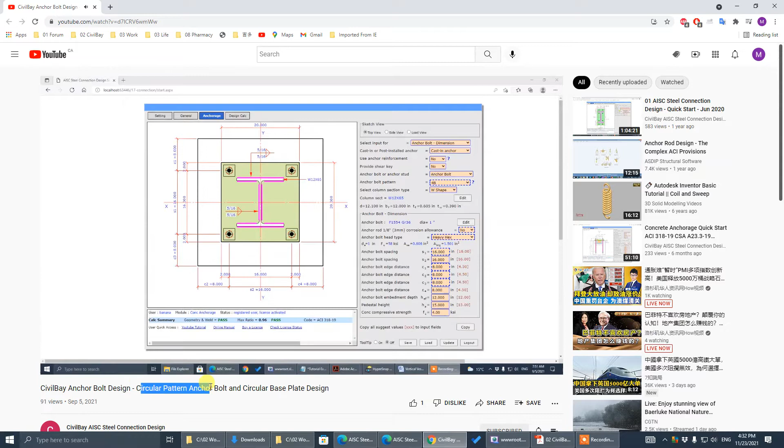Okay, I already addressed in past tutorials how to design the circular anchor bolt pattern. Click on this link, you will get it. Okay, that's circular pattern anchor bolt and circular base plate design. All right. That's the first tutorial.

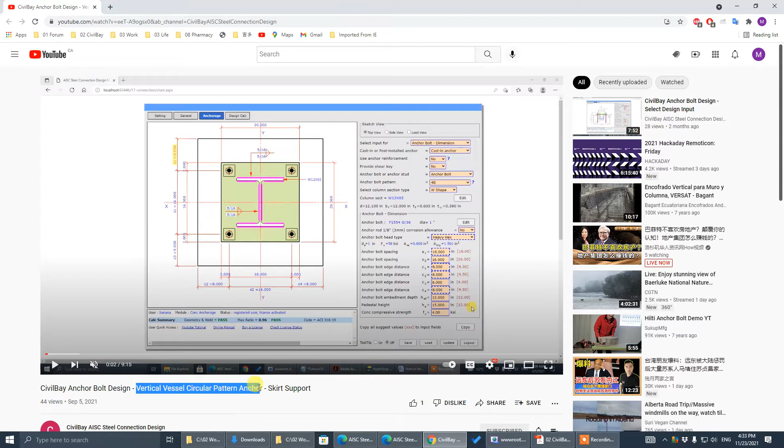The other tutorial is vertical vessel skirt support. Okay, so that's vertical vessel, circular pattern anchor bolt, skirt support. Okay, so for these two tutorials, you can click on these two links. You can find the specific design demo on how to do the circular anchor bolt pattern design, serving different purposes.

So in this tutorial, I'm going to summarize the difference between these two approaches. Okay. So these are two links for the previous tutorials. You can check them before viewing this video.

Okay. So we have two approaches for circular anchor bolt pattern design. One is for circular steel column sections like a pipe or CHS. We abbreviate this one as CCS. The other approach is for vertical vessel skirt support. We abbreviate it as VVS. So what's the difference between these two? They are both circular anchor bolt patterns.

Okay, so CCS is more suitable for a circular section steel column. This one can be a standalone circular column like a light post. It can also be a steel column in a steel frame. You get a foundation load and design an anchorage. The supporting concrete surface is most of the time a small area like a concrete pedestal.

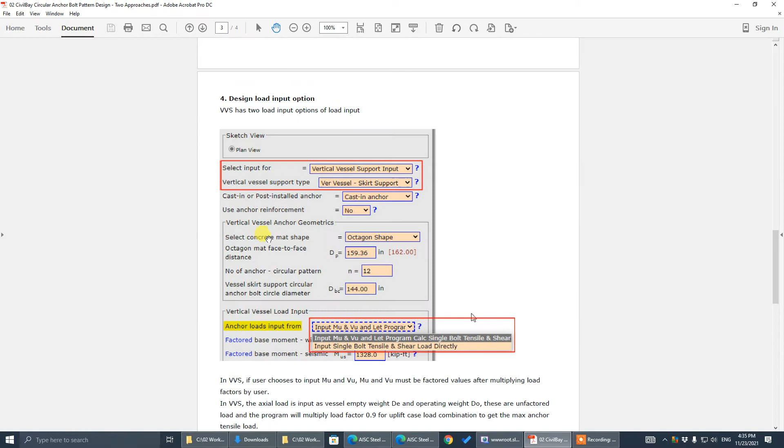Okay, there are 7 points of difference: 1, 2, 3, 4, 5, 6, 7. Before I go through these 7 points in detail, I will show you how to access these. So we call them CCS and VVS from now on: steel column and vertical vessel. So now let's try CCS.

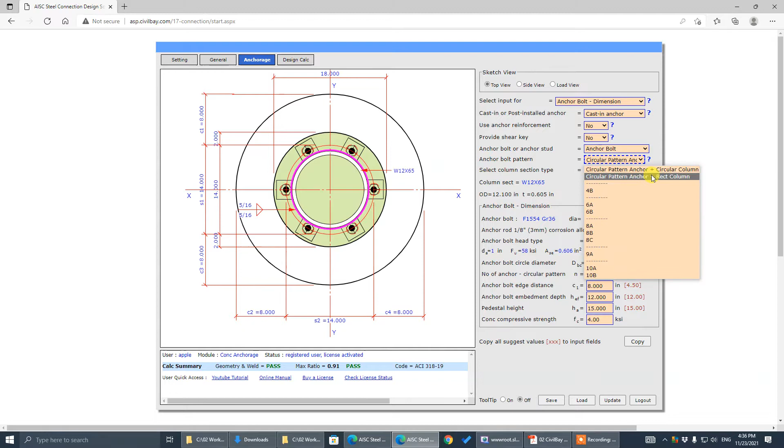Basically, you get it from circular pattern anchor bolt plus circular column. The pedestal is circular, and you can also go for a rectangular concrete pedestal, but with circular anchor bolt pattern. That's a rectangular concrete pedestal with circular pattern, and the other one is a circular concrete pedestal. Let's call it CCS. How to get it? Starting from anchor bolt pattern here, put down these two.

The other one is VVS. So go to VVS. You have to check this vertical vessel support input. You have to change this case to vertical vessel skirt support. Okay, you get VVS. Then for the concrete pedestal, you have two options: octagon shape concrete pedestal, or circular shape. We go for octagon shape for now. So that gives you an idea how to access CCS and VVS in our program.

They are both circular anchor bolt patterns. So what's the difference? And which approach should I use when designing my structure? Which one is better suited for me? And why did you create two approaches in your program? There's a reason behind this. So let's go to details.

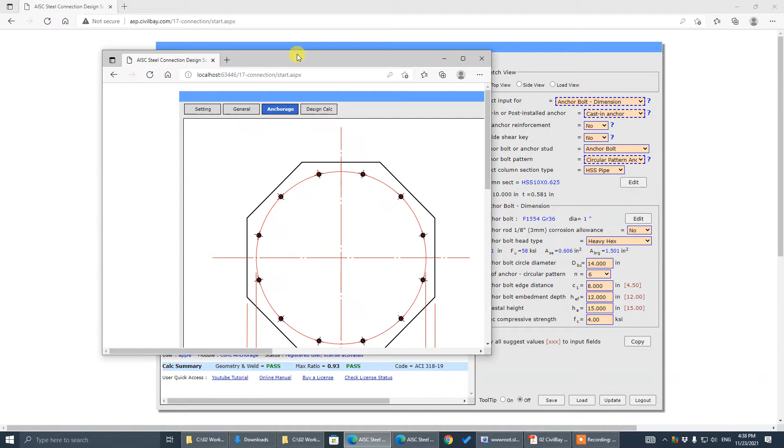First difference: anchor load with moment or without moment. For VVS, the anchor load definitely has a moment involved. This one is for vertical vessels. It can also be a silo, a steel industrial storage silo or whatever. There is definitely moment load involved in this application. There must be moment.

Meanwhile, in CCS, we go to design load. We can take moment in the input here. By the way, because it's a circular anchor bolt, that one is for illustration purposes. In the load input, we don't implement the exact bolt pattern. There's a circular bolt pattern here, but for load input we don't update that. We just show you the load directions. That's it. Circular bolt pattern.

Someone asked me why there's no two-direction moment. For circular patterns, normally you combine the lateral load in one direction, and a circular pattern you can apply in any direction, so it's not necessary to be two-way bending. So normally what I do is I combine the lateral X and Y in one load and apply the overturning moment to the base. I get only one moment instead of two directions, for circular anchor bolt patterns only.

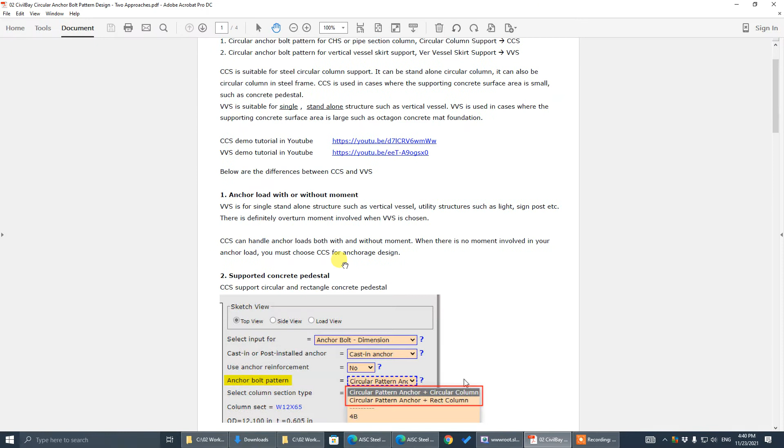So in CCS, we have moment input for sure, but you can go without moment, with axial load only. So we have an option of with and without moment. That's the idea. In VVS, there must be moment, okay? But in CCS, we can go with and without moment.

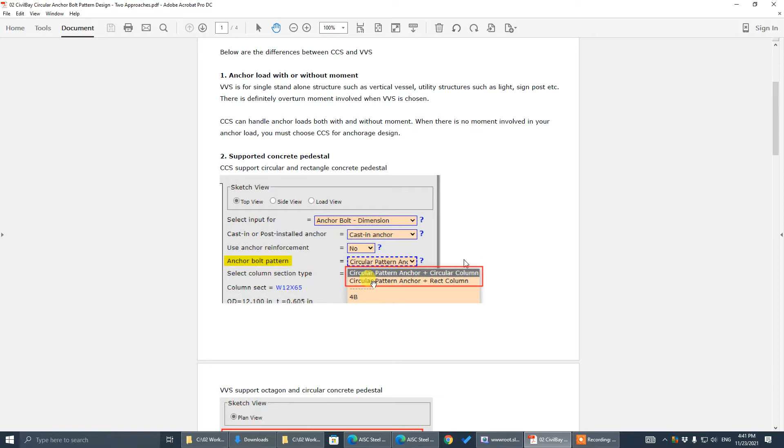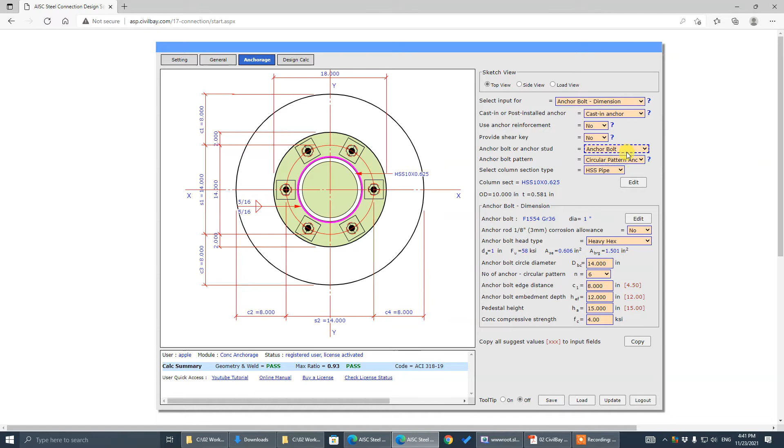The second difference is the supporting concrete pedestal. So look at this. In CCS, as I showed you a minute ago, you can have a circular concrete pedestal, or you can go for a rectangle concrete pedestal. These are the two options for CCS.

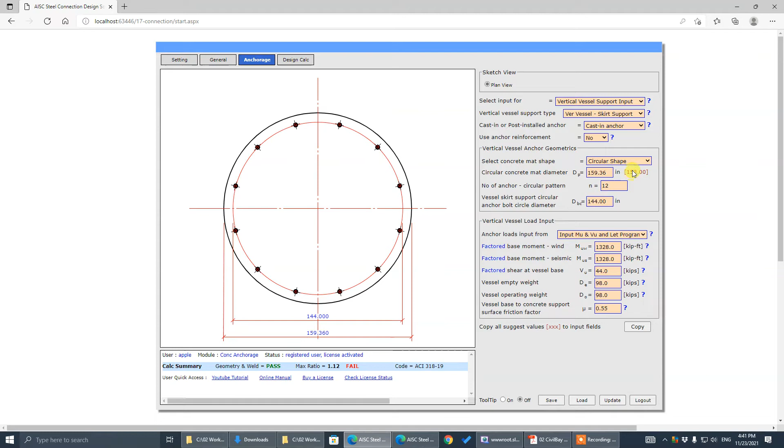But for VVS, the concrete pedestal is octagon and circular. So they are different. There's no rectangle here. But in CCS, there's no octagon pedestal available. So the type of concrete pedestal is the difference between CCS and VVS.

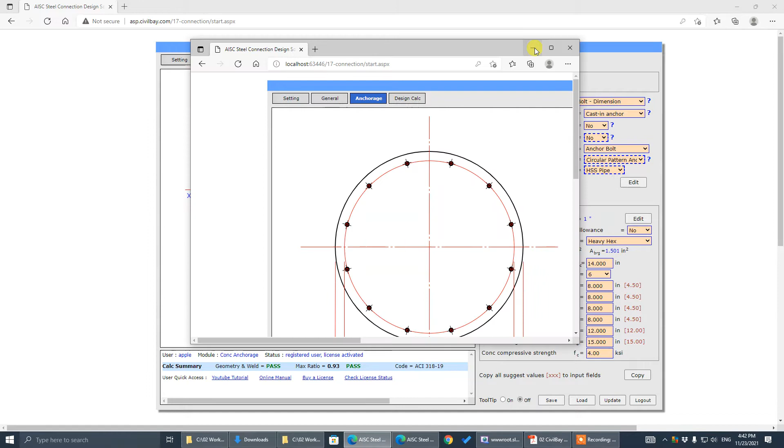The idea is like one object put on a table, and you use a finger to push it. That's called static friction resistance. You increase the force in your finger starting from 0 to a certain value. Below that value, the object on the table won't move because static friction resists your pushing force. But once your force increases above a certain value, the object starts to move. That's called static friction.

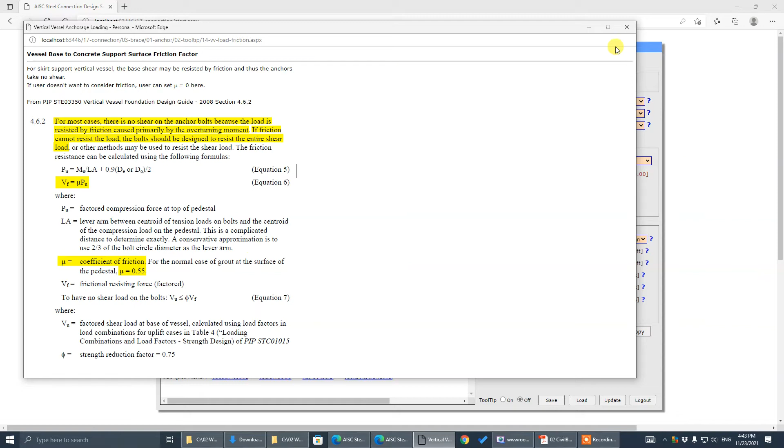So for vessels, we have this PIP standard. There's a mu value, a static coefficient of friction of 0.55. So we normally handle that: when lateral load is applied to a vessel, for example, there's a shear force applied to the base. If this shear force is less than the static friction resistance, we assume that force won't go to the anchor bolt, because the vessel base mobilizes the static friction and it balances with this lateral load.

To calculate this resistance, the factor is 0.55 multiplied by the weight of the vessel pushed against the concrete. I don't know if it's empty weight or operating weight to calculate PU. PU, I think, is a compression force, a combined force of empty weight and the overturning moment. So the compression force is multiplied by the friction factor to get the friction resistance, and multiplied by a strength factor to reduce it 25%. Once this friction resistance is larger than your lateral load, the anchor bolt will not take any shear force.

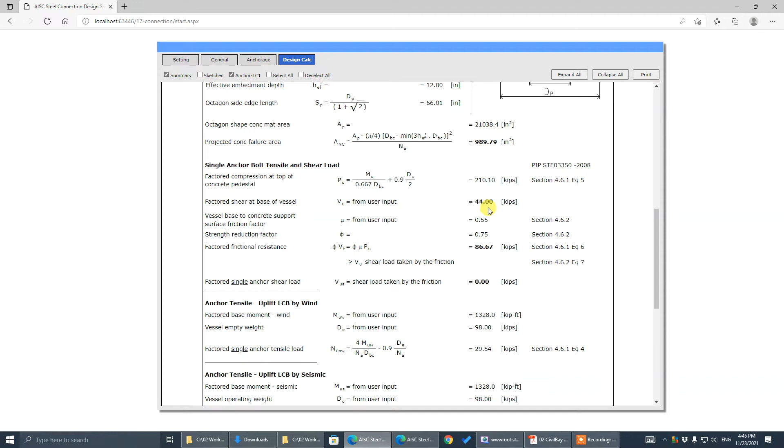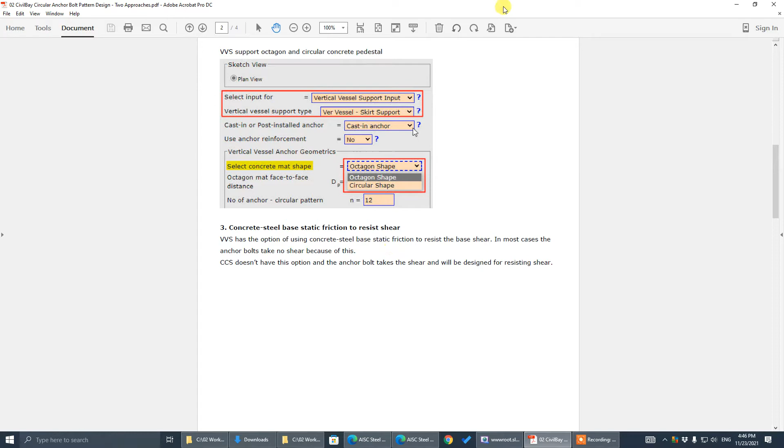So in VVS, static friction resists shear; it seems particular to vessel design. We have these options to provide the static friction coefficient, calculate the static friction resistance, and check against the lateral load. If the friction resistance is larger, the circular anchor bolt will take no shear. That's one option. If you don't want to consider that, you can set the mu value, the friction coefficient, to 0. Then no matter what, the anchor bolt will take the lateral load.

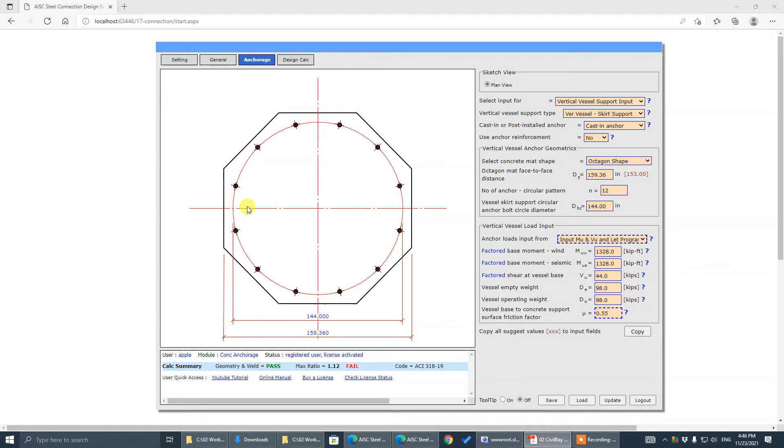So that's the option here for VVS, but for CCS we don't have this option. The lateral design load here has to go to the anchor bolt. We call it VY here; VY has to go to this anchor bolt. So that's the difference in handling the lateral load, the shear force, with the static friction option in VVS and without this option in CCS.

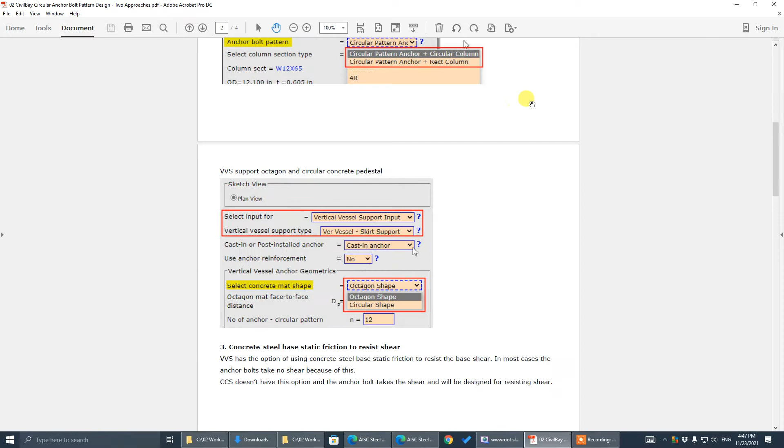Item number 4: design load input. Again, for the vessel, VVS, let's bring VVS here. The load input is under this one. We have a moment input.

Shear input: the base shear and base moment for wind and seismic. For base shear, you take the maximum of these two cases, either the shear of the wind case or the seismic case. And for the actual load applied to the anchor group, in CCS we ask you to input the actual load. It can be tensile, it can be compression, okay?

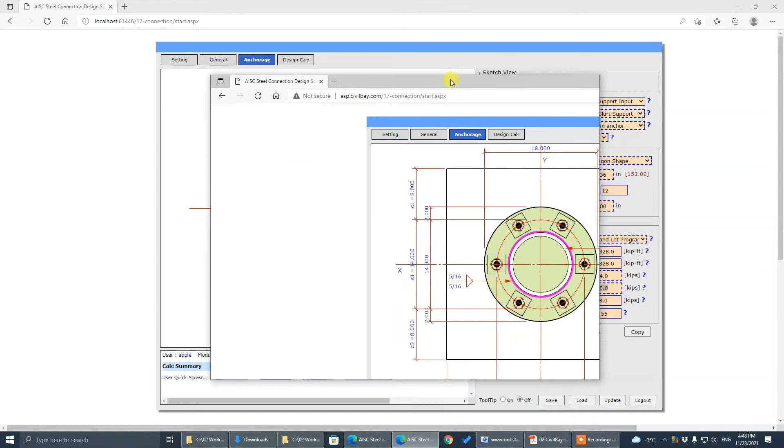That's in CCS, but in VVS we don't have this actual load input. Instead, we ask you to input vessel empty weight and operating weight. It's an unfactored value, but in CCS it's a factored value. And there are tensile options in CCS, but there's no tensile option in VVS. Obviously there's no upward load, unless you tie a balloon to this vessel. There's only gravity load going downward. So instead of actual load input, in VVS we have empty weight and operating weight input. It's unfactored, but in CCS the actual load input is factored, and it allows tensile.

So that's the difference in load input options. Also in VVS, we allow overturning moment and base shear input, and the program calculates a single anchor tensile force and shear force for you. If you don't like that and want to calculate yourself, we have the other option: you can input the single anchor bolt maximum tensile and shear you calculated yourself. There's no such option in CCS, okay?

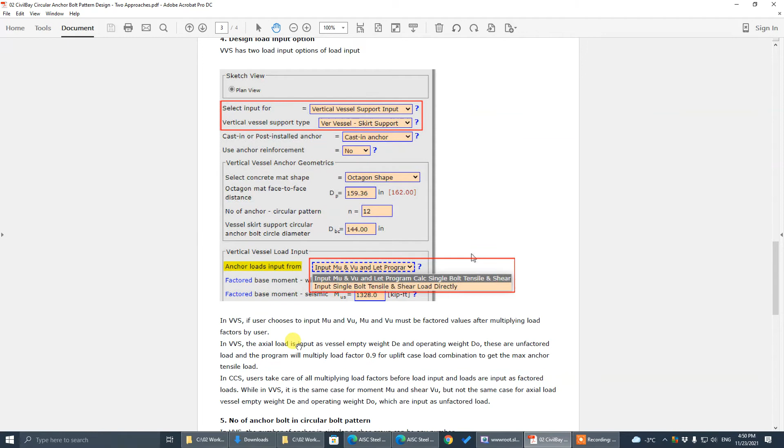So we have two options. The input Mu must be a factored value after multiplying the load factor. In VVS, the input is for a vertical vessel; we already took care of that. In CCS, take care of multiplying the factor. It's the same case, but not the same case for actual load. You can check with this one. That's the load input difference.

And the number of anchor bolts. So that's VVS. We have number of anchors in a circular pattern, 12. You can input any number here, no limitation. Let's say 9, or 6. Okay, we go back to 12. There's no limitation, it can be any number.

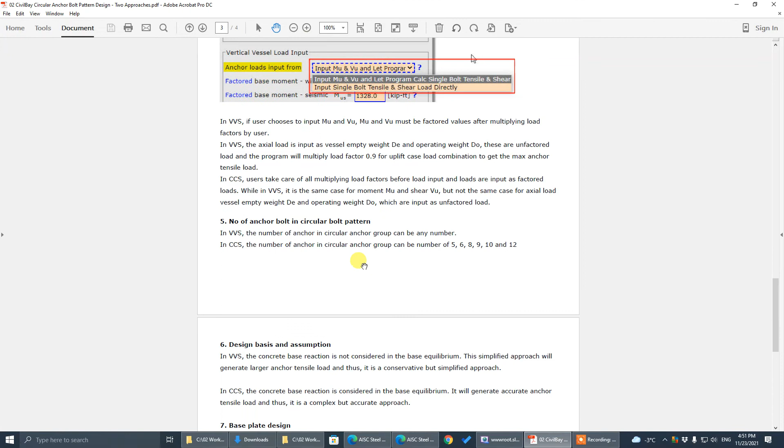But in CCS, go to anchor bolt pattern dimensions. Number of anchors in a circular pattern: we have only options of 5, 6, 8, 9, 10, 12. That's it. We don't allow other options. So in CCS, the number of anchors in a circular pattern is limited to 5, 6, 8, 9, 10, 12. So that's the difference. In VVS, there's no limitation.

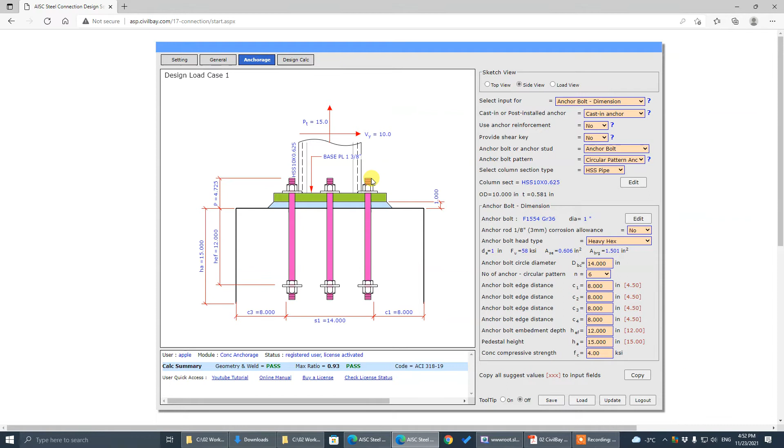Design basis assumption. Look at this CCS. How do we work out the anchor bolt tensile force? When we work out the anchor bolt tensile force, because the base plate is touching the ground or concrete surface, we consider the reaction of the concrete surface in the equilibrium. That's the accurate approach.

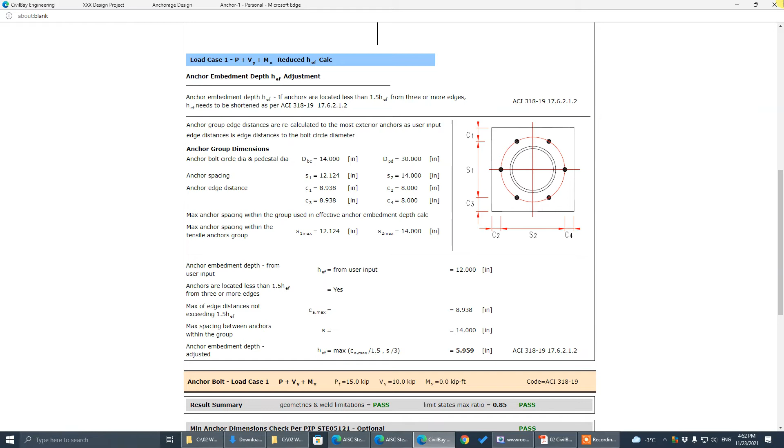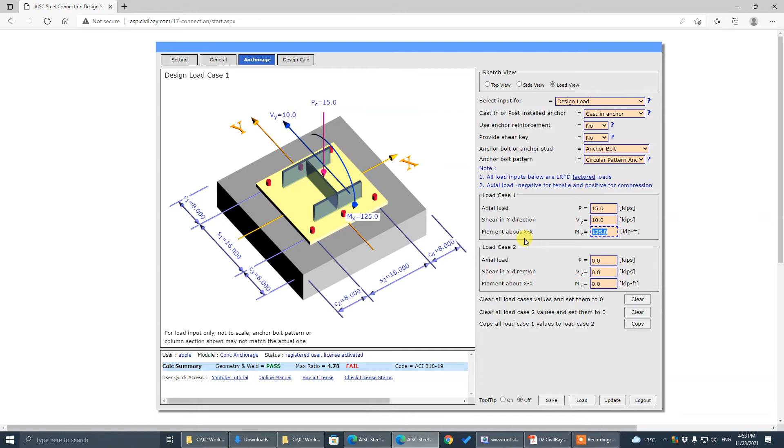So I bring this one out. Look at this. Oh no, there's no tensile force. So we increase the moment. It seems the moment is too small. No tensile mobilized. Let's try 15, then 125. Update. It's too huge, we go for 25. Update. Now 35. Okay, now print it.

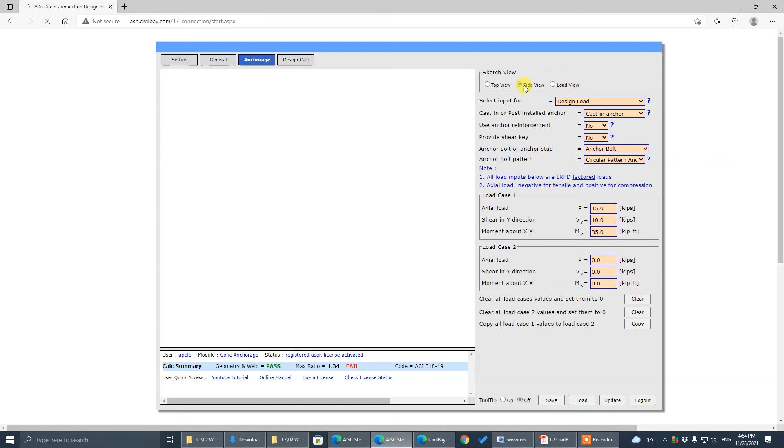So look at this diagram, the equilibrium. You calculate the tensile load under the moment. I'm talking about the design with the moment load case. Under the moment, we have mobilized tensile in the anchor. Meanwhile, there's also a reaction of concrete pressure going upward here, because you push against the concrete. You have a moment, side view, 35. You push against the ground or concrete surface, and there's a reaction here.

So these reactions are counted in the equilibrium of this base plate. When you have external load, you have tensile force in the anchor and also the concrete reaction. They are counted all together, so the base plate must be balanced. That's how you get the length of the concrete stress block. In CCS, we consider that, but in VVS it's not the case, because we simplify. That's a very complicated approach.

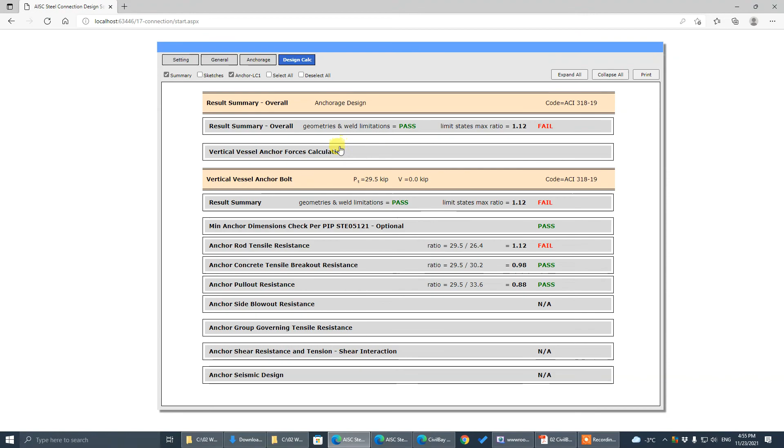In VVS, look at this design force calculation. We have this assumption: the moment is resisted only by the anchor group, and it doesn't take into account the contribution of concrete compression force against the base plate in the moment equilibrium. It's a simplified approach. Ignoring that is not accurate, but it's conservative because the anchor tensile force will be larger. So your design is still safe, but you waste some material, with maybe 20-30% larger anchor tensile force.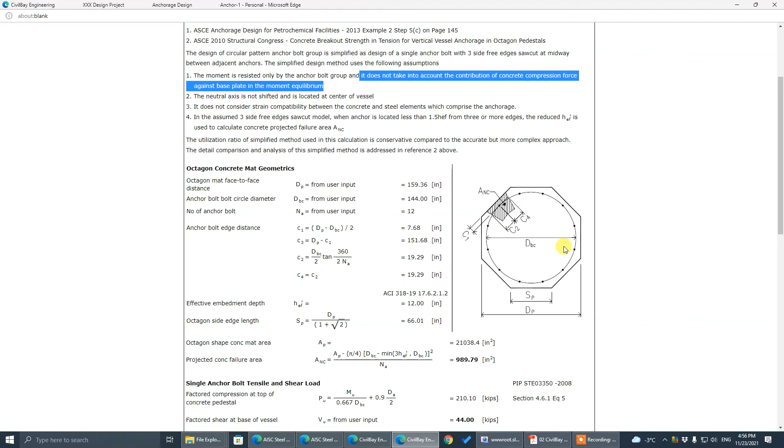But you design more for that. Okay, that's a convention in vertical vessel design. So that's the way people do it. Simplified approach. Okay. That's VVS, but in CCS, we go for the accurate approach.

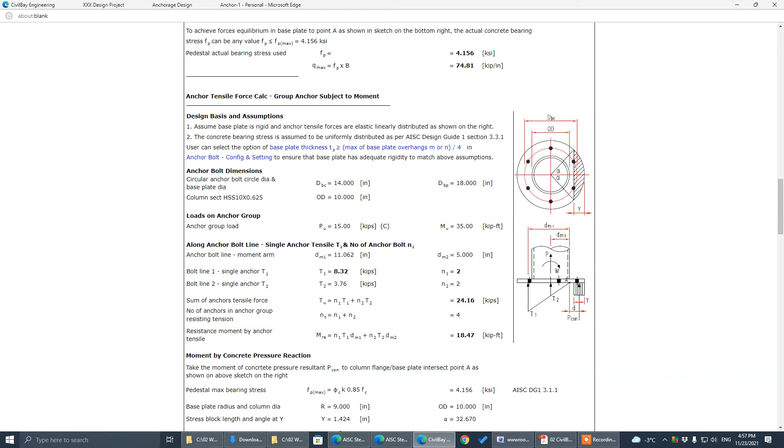Okay, so your design might pass in CCS but not pass in VVS. It's because CCS is more accurate. It generates accurate anchor load. VVS is conservative; it generates larger anchor load. So that's the reason. That's the design basis assumption. So in short, CCS is the accurate approach, and VVS is the simplified approach.

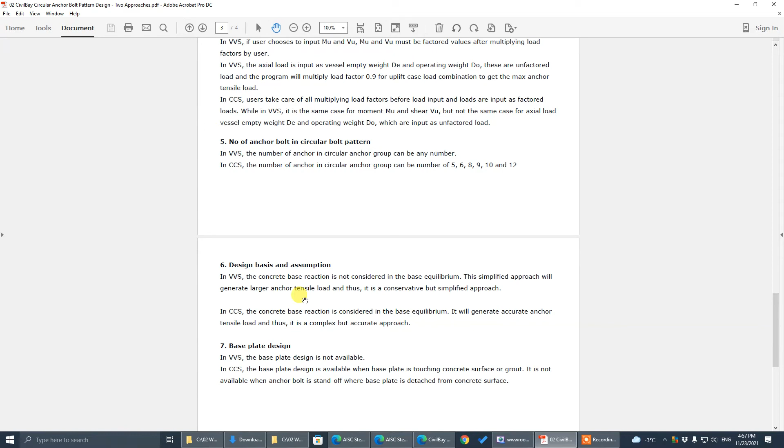We have discussion here, design basis assumption. You go to detail in this one, okay? So that's the design assumption difference between these two, and you can check this out. And the last item is base plate design, right? So again, go to item six, okay? Design basis assumption. We address the difference with VVS.

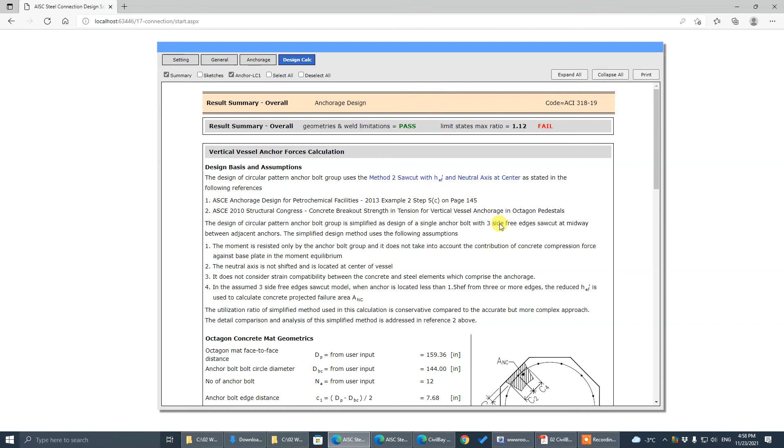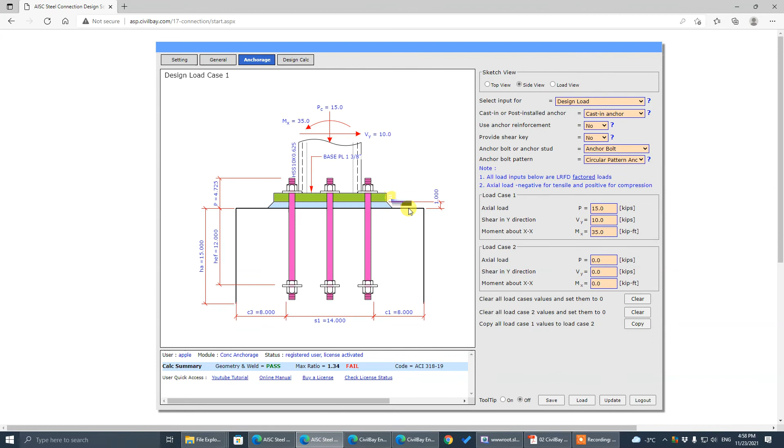There's no concrete. Okay, I mean, where is it? It doesn't take into account in VVS the concrete compression force. Okay, but in CCS we take this into account. But there's one more note here. That's for these grouting options. We have these options. We have standoff with grout and standoff without grout.

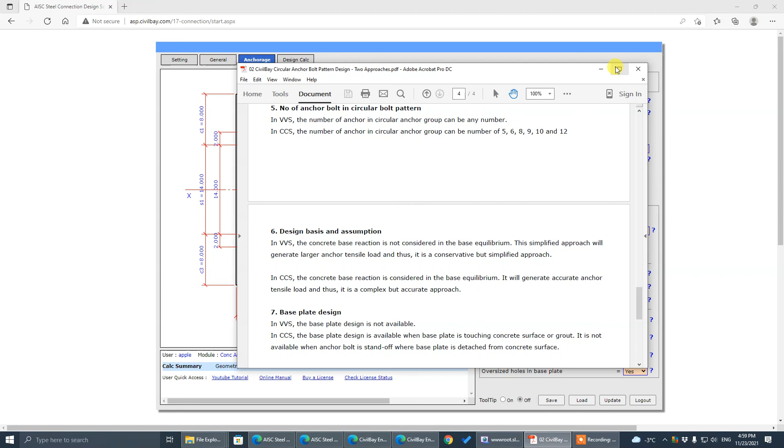In these two cases, the base plate pushes against the concrete surface. But for the standoff option, like these two guys, the base plate is detached from the concrete surface, so for these two cases there's no difference in terms of design assumption between CCS and VVS. All right, so if you go to these two guys, there's no difference there. Only the first two have a difference. Design basis assumption, base plate design.

So when you go for these two options, the side view, you see this standoff option. That's grouting. Anytime you go for this option, detached, 2-inch, there's no grout. The base plate is detached from the concrete surface. There's no base plate design.

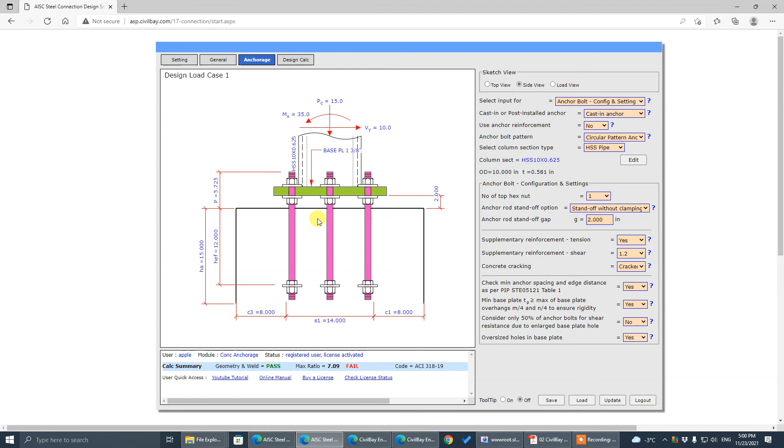Okay, so only when you go for grouting or the base plate touching the concrete surface, we provide the base plate design in these two options. In these other two options we have no base plate design. And because the base plate is not touching concrete, it would be more accurate if you model the base plate as a finite element and do the finite element stress analysis in a program like STAAD.Pro, SAP2000 or RISA.

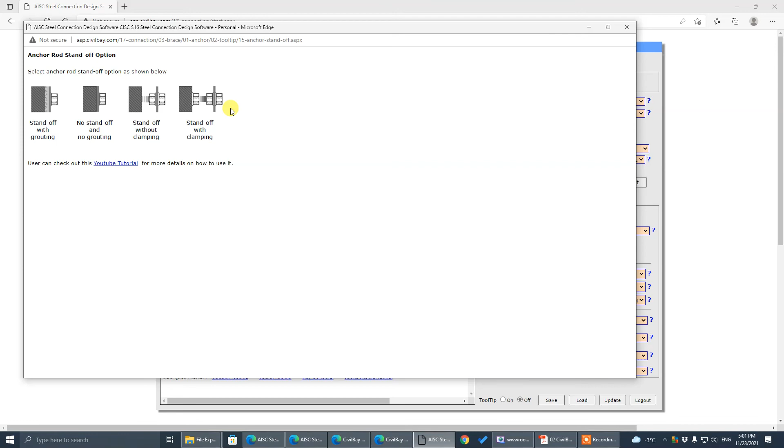But when you touch concrete, we provide the base plate design based on AISC Design Guide 1, I believe. So in CCS, we have base plate design when your base plate is touching concrete, but in VVS we don't have base plate design in any case. The reason is that for vertical vessels, normally the ring plate design or vessel base plate design is by the vendor. It's not by the structural engineer, so it's not our interest to design the base.

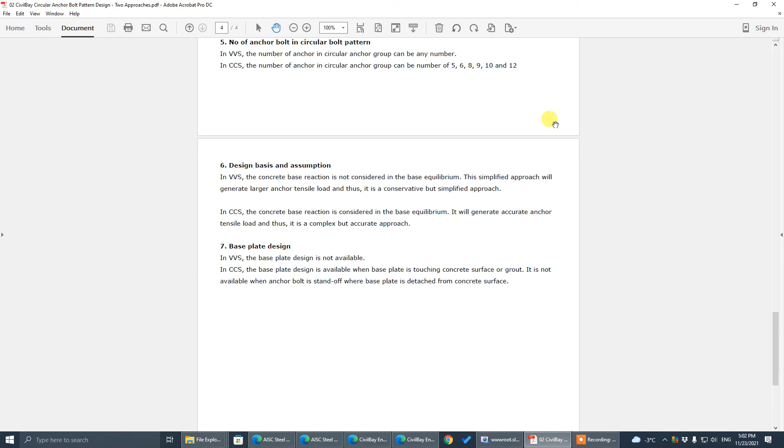It's quite different. A silo, vertical vessel, or whatever. The way they implement the base ring plate or whole base plate, or fiberglass, or anchor chair is quite different. There's no way we can do the base plate design in this vertical vessel support case. There's no base plate for VVS, but in CCS, there's a base plate design option when you pick the base plate touching the concrete surface. So that's the main difference.

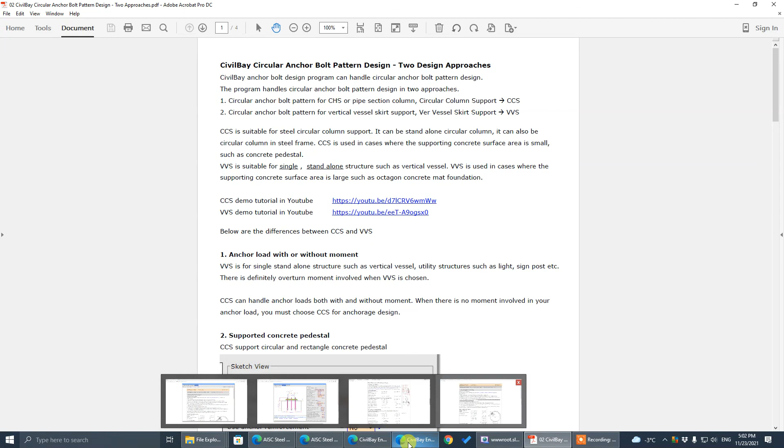For you to decide which approach you should use for your circular pattern anchor bolt design, you check through these differences, and we also show you how to use these two approaches. So you decide yourself. After this, we close this one. One more last thing. Well, that's CCS.

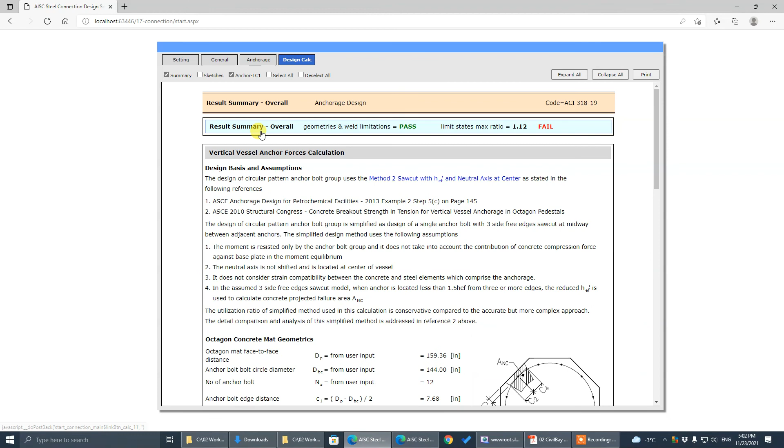For VVS, when you finish, if you are in vertical vessel mode and you want to go back to normal anchor bolt design input, you have to change this to not vertical vessel case. In that case, you can get all the input here. But if you stay with skirt support or leg support, I have another tutorial on that. Go through the YouTube tutorial, you will know that.

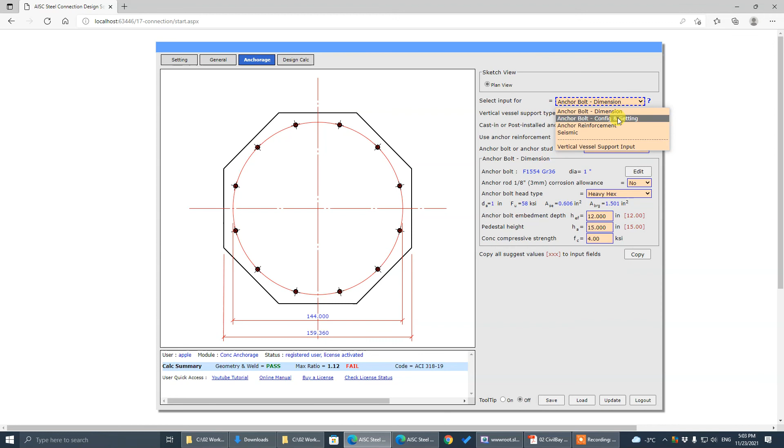If you stay with skirt support, you won't get anything. You won't get the full one, because it assumes you are still in vertical vessel design. The only way you can get out of vertical vessel mode is to go to vertical vessel support and change this to not vertical vessel case. That way, you can get all this input back.